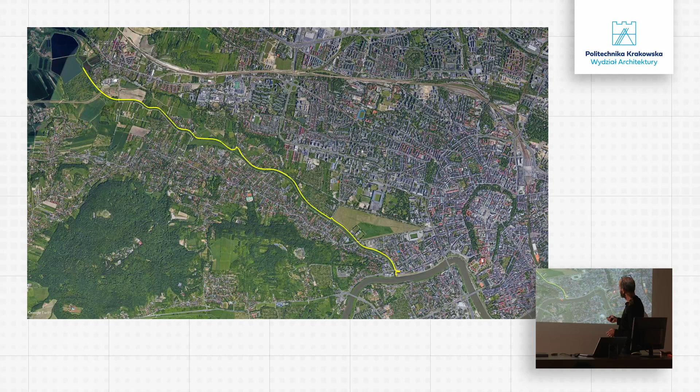Yeah, this is the Vistula River. So the Rudawa Canal goes almost to the airport. Going along this route, yesterday morning, I came across this image, which is a kind of ordinary image of this landscape, which is green.

It seems to be ecological, very much related with nature, particularly with this water stream. So it feels good. But if you look a little bit more carefully, you identify some things that are not as natural or as ecological as one might think. You see, if you look carefully, you come across some concrete structures, some buildings being built nowadays in the area with some so-called ecological devices or gadgets.

And behind the trees, the paradigm of ecology, you see some yellow elements, some yellow colors. If you look at these things more carefully, you realize that urban ecology, when it comes to ecology in cities, is not only about greenery, it's about the different relationships and the set of complex system relations established among humans and non-humans, materials, immaterial things also, cultural dimensions of the way we inhabit cities, and metabolic flows.

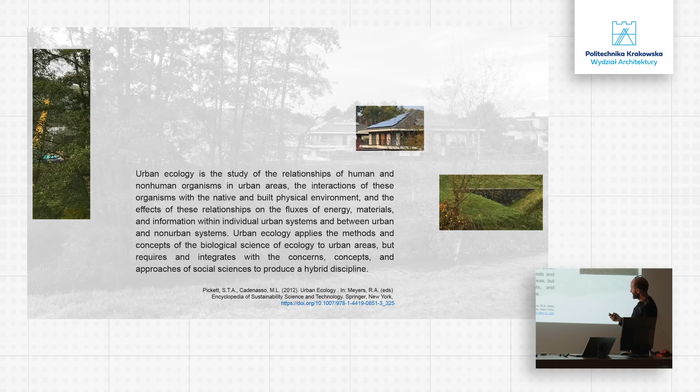And if we look more in detail to these elements, you may guess that we are talking about sewage system, throwing the water to the river canal directly, after some purification processes, hopefully. But also we see buildings being built at the moment with some ecological gadgets, solar panels, and that yellow color behind the trees is no more, no less than a building crane.

Helping out with the construction of new dwellings made of concrete, which is the most unecological material. This is the most polluting and most carbon dioxide emission industry we have in the world, even more polluting than aviation, for instance. And this all happens in this very idyllical landscape.

To me, coming from a very dense city from Southern Europe, this still looks like a very pleasant, very natural landscape. But my point here is that by looking sharply, by having a more intentional look at things, we may discover the complexity of ecologies happening all around us.

The driving thread of this ecological thinking for many years now has been water. Water being the most basic element present in any single ecological process. So it's nothing discovered recently.

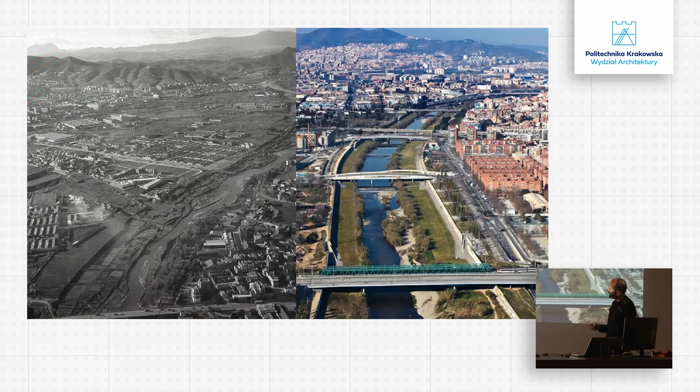There are two main rivers in Barcelona. One is the Besòs River. I've been working on that for some years now, but this ecological approach is more recent. Here are two images of the same river: late 50s, and how it looks today—quite urban. It has been regenerated, so today it may look like a very successful public space, but it has also been the stage for frictions between environmental assets and new urbanization.

Some people, coming from different contexts, may not even call this a river. It's much more of a water stream surrounded by dense neighborhoods, industrial estates, plenty of infrastructures, metabolic services, water depuration, waste management plants, and so on. So it's not what we commonly understand as nature.

But if we go back in time, not so long ago, we discover that in the early 50s this was quite a natural area. The river was not regulated. There were plenty of agricultural crops around it. Actually, Barcelona at some point, mid-20th century, was self-sustainable from a food production standpoint, and much of the food was produced here.

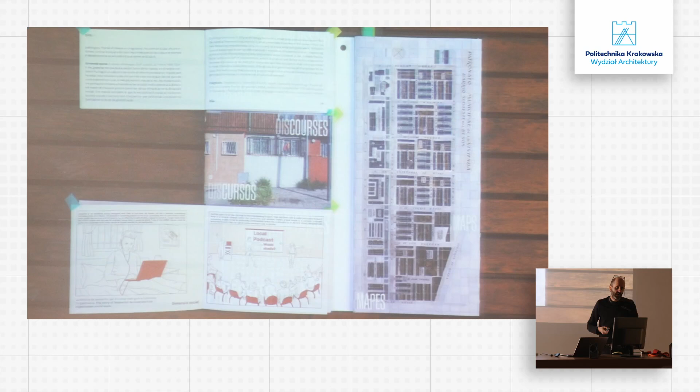As I mentioned, our book, or this book of books, is not a linear reading. These chapters are organized in 4 different books or sub-books, so the reader can play with them and go from one to another, jumping from concept to concept and making a cross-reading between the glossary, the proposals, the so-called discourses, and the mapping. The idea is that each reader may be able to come up with her or his own conclusions, building her or his own narratives. I will go now through the different chapters.

The glossary. The glossary is a collegiate endeavor. This is something that all of us professors teaching at this particular master program did together. We set a number of interviews. All of us were talking about our particular obsessions. At the end of all this process, we transcribed all these interviews, and we came up with a number of critical concepts for us. They are defined and included in our book, and these are the most important ones.

Actually, they are all of them here, right? And they are ordered according to the importance that we give to them all together. It's a kind of polyphonic definition of terms. They are all there defined by all of us, right?

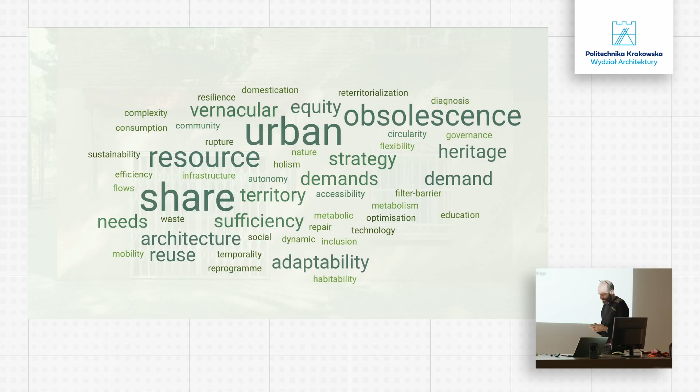So I would highlight some of them. Of course, the urban ecology question is an urban one. It's not something we can deal with from the object standpoint; we deal with it from a wider perspective, a wider scope. So that means going for urban. We pay a lot of attention to resources and demand, this equilibrium or balance between the availabilities of a certain territory, which are the resources, and the social demands. And everything when it comes to sustainability is about the balance between these tensions or components, right?

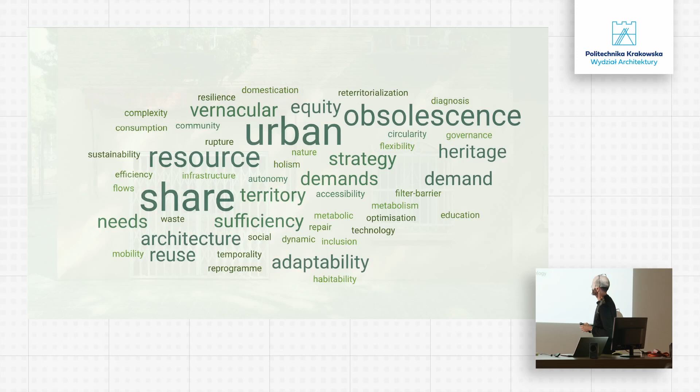Obsolescence is a very important word for us also, to recognize why material realities become obsolete, not because they become obsolete from their material standpoint, but also from their functional standpoint, their symbolic standpoint, from the social standpoint in general, right? So adaptability also is a concept we pay a lot of attention to. I won't develop longer on this.

You will have the book, and you always have the opportunity to go to the interviews that are registered and posted online on this website, UPC provides, upc.edu. There, if you search for glossary on sustainability, you will find this video of around 25 to 30 minutes where you will see, from first voice, the definition of these terms by the staff working in this research project.

Okay, maps. This is important. Once we identified this corridor, this Besòs River area, we started to analyze it using geographic information systems. We began by recognizing and analyzing what was there before the urbanization process began. This is a map from 1956. Besides the land use, this is just showing the imperviosity of the land, how impermeable the land was.

Because, as I said, the water cycle is absolutely critical for us. Being aware of the need for rainwater to drain down to the soil and replenish the aquifer is a matter of life and death for us in Barcelona. So before urbanization, actually, I forgot to mention, this is a delta area. Much of the drinking water in Barcelona used to come from here. Not today, because the aquifer has dried up due to processes I'll tell you about, but it was in the past. And this aquifer was replenished because the topsoil was permeable, right?

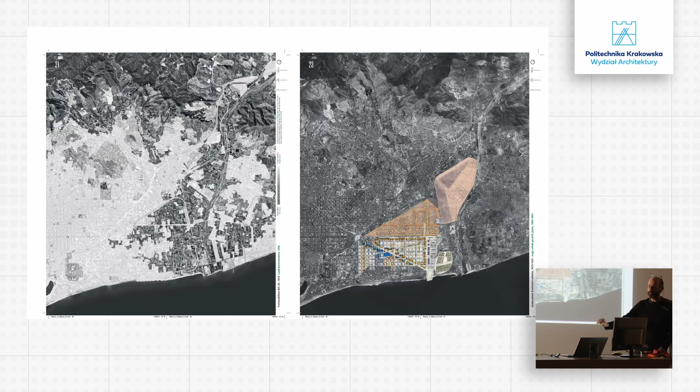But in the span of only 4 years, this happened in the city of Barcelona. This development, these are the original plans for the area. As you can see, the idea was to seal everything and extend the city to the very border defined by the river. And this is how the city looks today in terms of permeability. So this is an incredible disruption of the ecological cycles, as you can imagine.

So we started by acknowledging data that I won't show you, but it's available in the book. And this is what we call the climate intensity maps. These are different components that have been built over the last 50 years. The darker areas show the latest and most improved data.

This is crossing data regarding the exposure of a space to climate change, the sensitivity of the population living there, and the capacity for adaptation. These are the 3 factors considered when it comes to climate change vulnerability: exposure, being the physical conditions of the space, how impermeable an area is, how many trees there are, or this kind of physical factors.

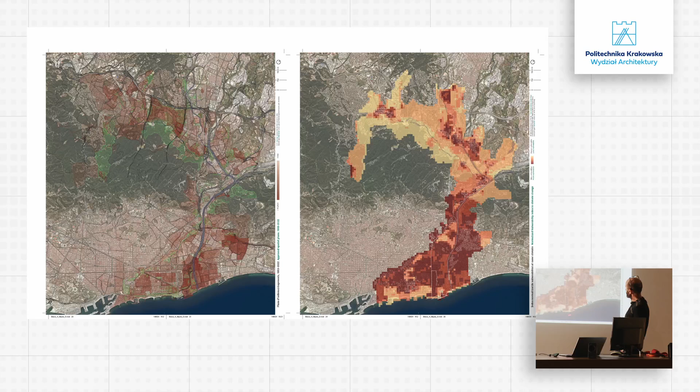Again, this part is quite dark in color, and the darker, the worse. Income per household is what you see here in this map, and NDVI, the normalized difference vegetation index for that area. So it all pointed towards this very end of the river.

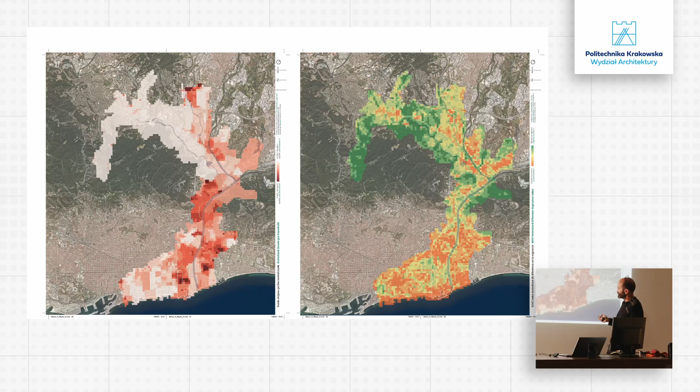So we started focusing on narrowing down to that particular area, and we developed some other maps, which you are seeing here at a closer scale: again NDVI, land surface temperature, Gini index, assessing inequality within a certain area, and again income per household.

After this process, it became quite apparent for us that this area was suitable for our studies, combining socio-demographic vulnerability with environmental vulnerability. So we were ready to identify our case study, that you will see in a closer look here.

This is the development of the area over the years. You see that we are moving from a 100% agricultural area to a fully, highly dense urbanized area. The sudden urbanization of this area happened in the span of only 5 years.

And because of the living conditions there, the environmental conditions were not that good. This is a delta area, so the soil is not stable for construction. It's quite unstable, so the buildings today are going through an acute pathology process, physical degradation. They are not stable because they are built on land that shouldn't have been built on, never.

Still, we identified 2 neighborhoods. One is El Besòs, this is what you're seeing on the screen, around 100 buildings, 5,000 dwellings, and 25,000 registered residents here.

We are not counting here people living off the system without being registered, which in Barcelona, as you can imagine, that number is high. We don't even know how many people are living in this particular area.

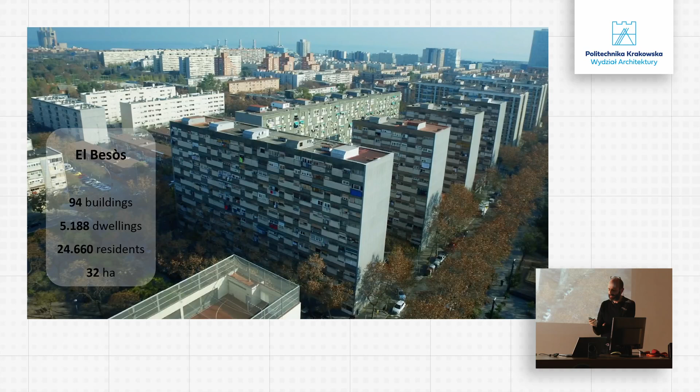And next to it, we have La Pau, half of the size, to make it simple: 12,000 something residents, 2,500 dwellings, 60 buildings, 17 hectares. So we are working in these particular areas.

These were areas that were very rapidly urbanized during the late 50s, early 60s, as a way to remediate or find a solution for the informal slums that were popping up all over the city of Barcelona as a result of this massive migration flow arriving to the city.

So the first newcomers to the city didn't have proper living conditions. They were living in barracks, in slums. So the Francoist regime at that time undertook this public housing policy, building these housing estates, which could even be defined as piling up vertically these slums, because the very basic conditions were not even provided.

The streets were not urbanized. In the early years there were no public facilities, not to mention public spaces, but still conditions were a little bit better than in the previous informal slums.

So from the physical standpoint we have described these case studies from the physical and historical standpoint, but most importantly, we have been in close contact with the different local agents working or living in these particular areas, from politicians, authorities, to technicians, officials working at the city council.

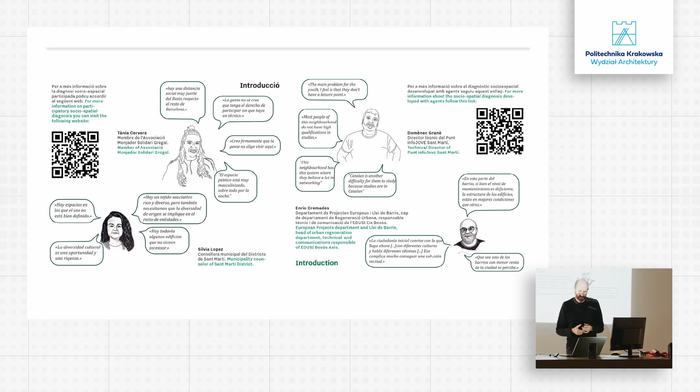And from the physical standpoint, it's not only the housing stock, but also the capacities and the conditions of public space, basically a space in between buildings. We are in a very particular urban morphology in which 80% of land is free from buildings.

The footprint of buildings means only 20%, which is quite different to traditional cities, where the proportion is quite the opposite. In traditional very dense cities, like the city center of Barcelona, 20% of the space is public space, streets basically, and 80% is just building footprint. So here it's the other way around.

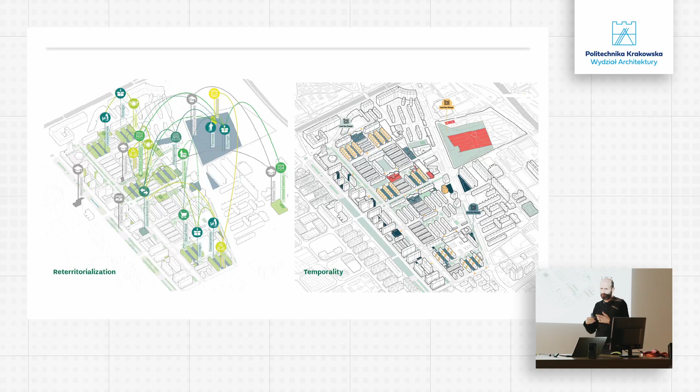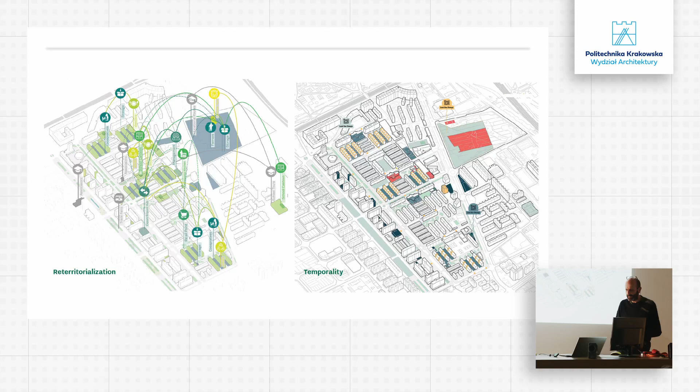That's why attention to public space, to space in between buildings, is critical for many reasons, for the quantity but also for the potentiality, when it comes to urban farming, when it comes to this hydrological or water cycle process. It's super important to intervene in those in-between building spaces.

Also an exploration or description of the housing stock. This is something I forgot to mention: our master's program is not an urban planning program, it's a transversal program. Professors working from different disciplines and departments cooperate together to give our students a transscalar and holistic understanding of these ecological issues. For the neighborhood of La Pau, the typological diversity is quite rich and interesting, which is an asset when it comes to flexibility and adaptability to new needs.

Having identified the case study, then come the discourses. There are seven working lines for us, seven research tracks that we are following, and they are called discourses. I will go through them very quickly, just naming them.

The first one is the so-called social metabolism, which is a discipline in itself. It's a scientific field that aims at describing ecological processes by measuring and assessing the flows of a certain society, meaning water flows, carbon dioxide emissions, material flows, and trying to describe the socioeconomic model in that particular area through the assessment of the different flows taking place there.

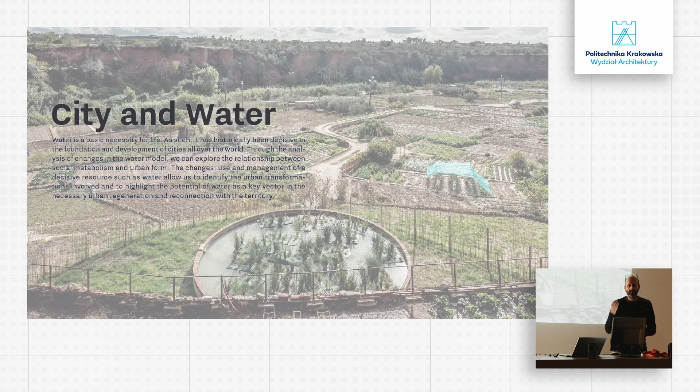Then city and water, understanding water as an indicator, a very good way to disclose the conditions and the aptitudes or suitabilities of a certain territory.

City and energy is very much focused on describing the different models we have of using the territory through the assessment or description of energy systems, called energy cultures. The key point here is the usage, yes or no, of fossil fuels. We are not for that, as you can imagine, but we are also a little bit critical about the extensive use of solar energy — we can talk about that later on.

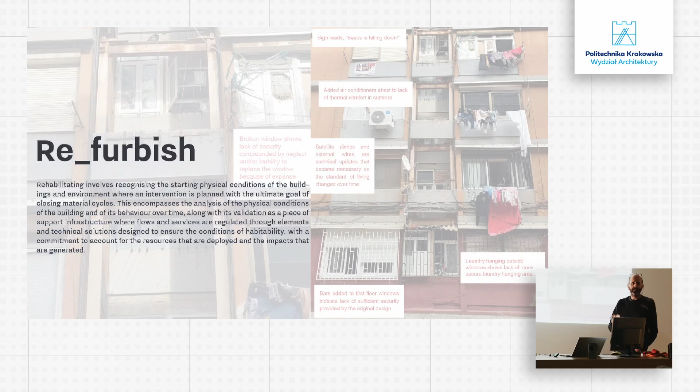City and society is about engagement with local communities. Then refurbish pays attention to the material conditions of the buildings — we can get a lot of information just by looking at the facades and analyzing their material condition, what gadgets or changes the facade has suffered over time, because users typically express their needs on the facade of buildings. AC popping up on facades, for instance, is a clear indicator of an unsatisfied need. So we have information — clothing hanging on balconies, for instance, shows a need that is not provided for within the domestic space, and so on.

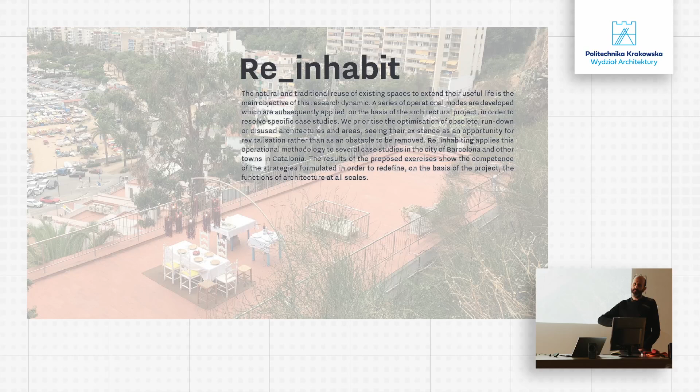Re-inhabit is very much about the functional program of buildings, especially residential buildings, and how a nuclear family-based architectural typology — a dwelling of 80 square meters with 3 bedrooms, addressed for a mono-profile — may or may not give a proper response to the current needs of society. So Re-inhabit is about reflecting and discussing the functional programs of cities.

And finally, Regenerate is about understanding the wide scale of the city and how environmental systems or environmental commons can work well or not in light of the many challenges we have ahead. So we define these discourses — these are the lines our students work on during a whole academic year.

Also working with local schools and secondary school students — we go there, learn a lot from them, and make them participate also in our program. We think that with these kinds of issues, it's important to plant the seed before students come to the university. That's why we reach out to the secondary school system and are also part of their activities, with some cooperation.

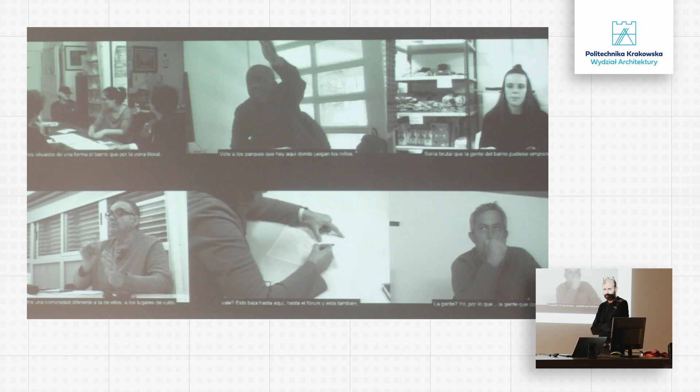And of course, the now well-established methodology of reaching out and getting to know local agents, local associations, migrants, officials, and different entities that we engage in our discussions — we learn a lot from them. As I said, all this process has been recorded; you may find the different interviews there, recorded and available in Zona Video UPC, where there is plenty of very interesting information.

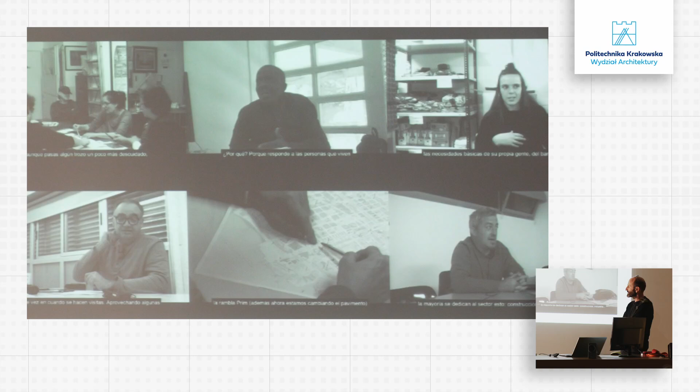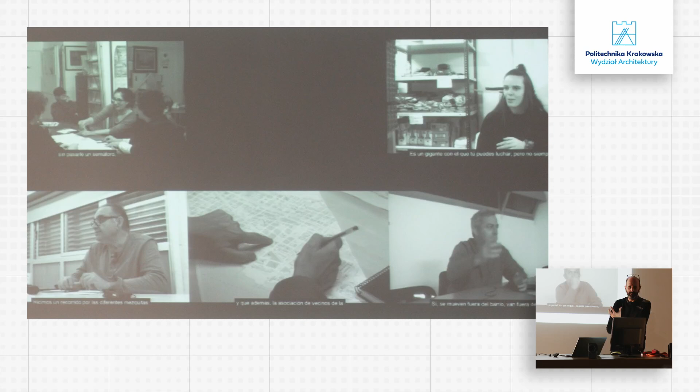It's not a punctual contact that we establish with them. They are together with us all along the process, and they will continue. We believe in endurance, in being there, presence, a long time. So we have been more than 3 years now in close contact with the different associations.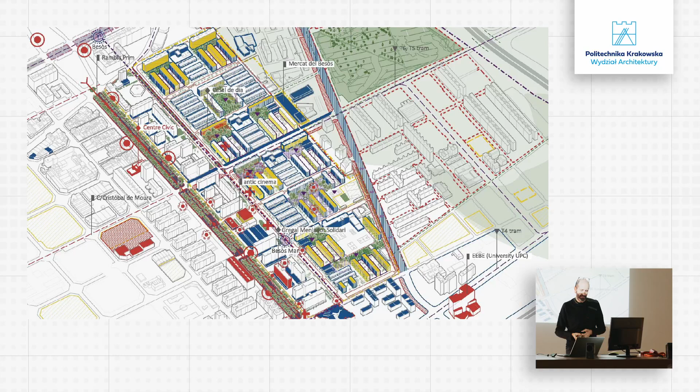We placed these issues or topics in this diagram in order to identify where we may find the weakest and strongest points of this particular neighborhood. And then we translate that into space. We territorialize those topics, following the same color chart. We describe spatially this very abstract diagram that we have here.

One of the final outputs of this work is a magazine that is not intended to be a scientific magazine, even though it has its number and it's registered and so on. The idea is to spread knowledge and disseminate our knowledge across the local residents. So the language used here is quite popular science language. And we distribute this magazine through the different communities that we have been working with.

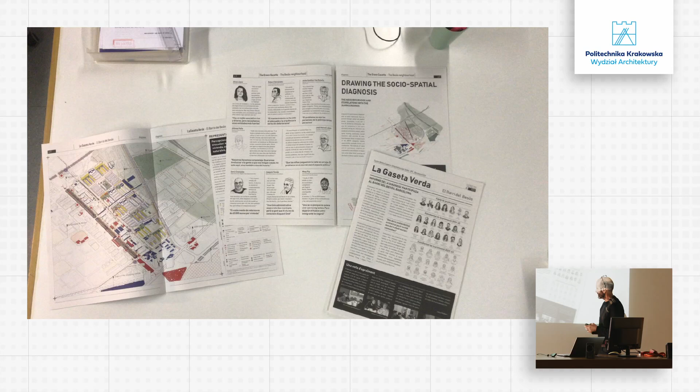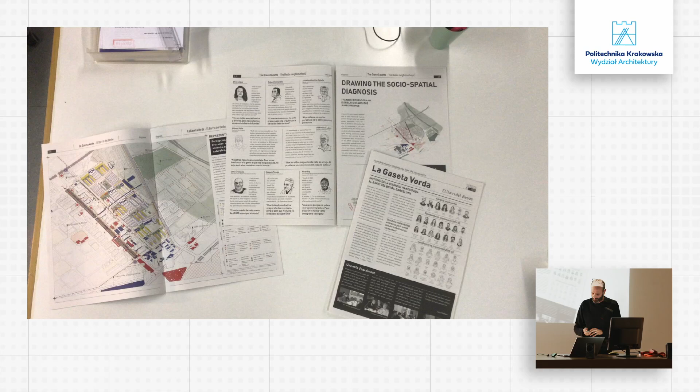We are at the moment preparing more of these magazines related to other neighborhoods that we, together with Politechnika Krakowska, are working on.

The proposals — this may be the part that you're more interested in. So I prepared 3 proposals, 3 projects. Of course, I cannot explain them extensively, but I will try to go to the main points.

Our master program is quite a horizontal one. It's for sure us professors delivering, or more than delivering knowledge, trying to coordinate the way knowledge is delivered or shared. It's an international program, so students from all over the world are coming. In this particular venture, over the last 2 years, we have had students from more than 25 nationalities.

As you can imagine, coordinating that, different cultural backgrounds, different mother tongues, etc., it's a challenge. But I think I can fairly say that we have succeeded, and at the end our students keep friends for life, in a way.

First proposal that I wanted to show you: OBRES, a new model of sustainable community construction, Besòs Organization for Ecosocial Regeneration. This has to do with the idea of suitability and feasibility. We make numbers, a lot of numbers, a lot of calculations, so that our proposals are taken seriously by the officials, by the public authorities.

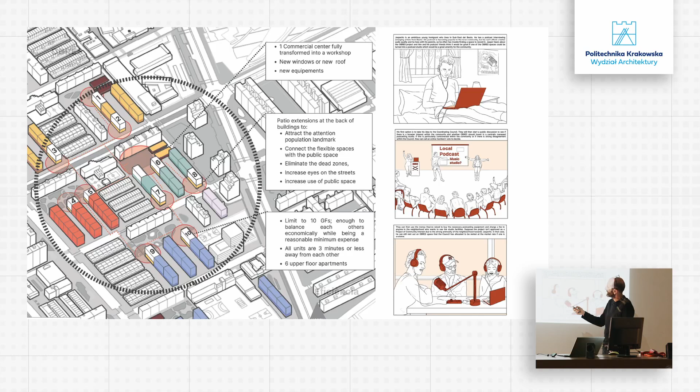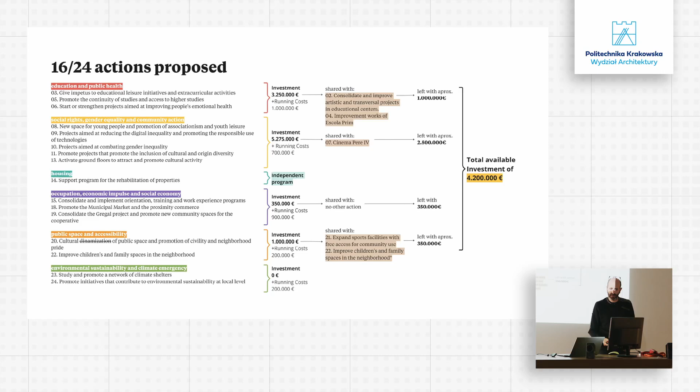I cannot go deep into them, but the important thing is that they are assessed. In this case, they were put into relation with an existing initiative, the Pla de Barris, the neighborhood plan for the city of Barcelona, and they are assessed economically — plenty of calculations. This is the final summary sheet of the whole calculation, but there is a whole super complex Excel behind that. So the required investment is assessed there.

The image is a little bit burned here, so it's too bad, but this is an axonometry describing the several interventions, the several actions proposed for this neighborhood — from reprogramming some abandoned public buildings to intensive work at the ground floor level. We see the ground floor level as a critical space for intervention, the relationship between the building, meaning the private domain, and the ground or public space, meaning the public domain. There were some technical issues regarding differences of level, activities allowed or not allowed. Our students also read the urban regulations — what is allowed, what is not, what should be done, or what should be changed.

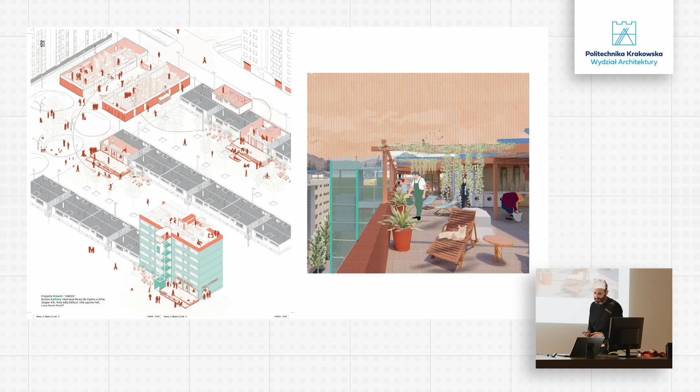I'm sorry this image isn't showing the detail, but maybe later we can see it more clearly. Some before and after images are really important to show the improvement, the difference between before intervention, how these spaces looked, and how students imagined them after.

This functional program for the abandoned public building is based on co-design, a dialogue with local agents who posed their needs and what they miss in the neighborhood. Assessing whether that's possible from the architectural standpoint, students design and propose interventions.

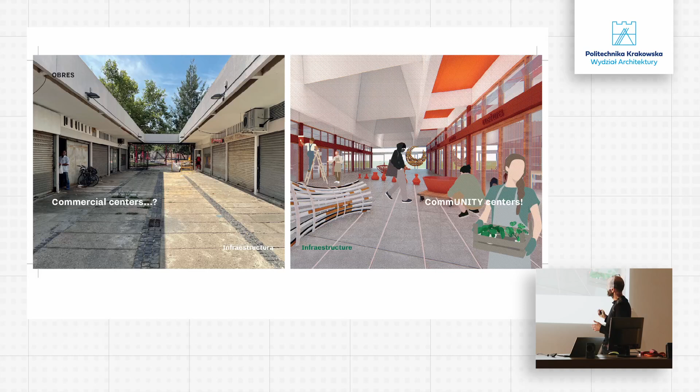We think that's not enough—that's a technological fix, but it doesn't mean social engagement. We strongly believe communities need to be engaged with their actions. If they're just provided with solar panels and a solution for the facades without being part of the process, in the end this investment will be lost because no one will take care of it. So this is our proposal.

Some of the improvements proposed by the City Council are considered, like improving vertical accessibility with new elevators. But we propose a reconfiguration of the rooftop, rather than just planting solar panels—maybe some common activities. This has much to do with redefining the functional program as a radical proposal.

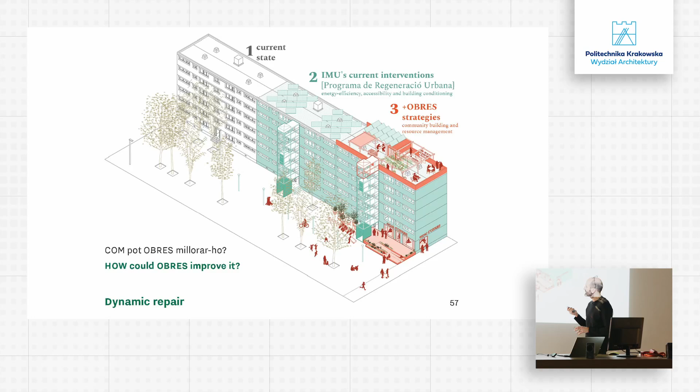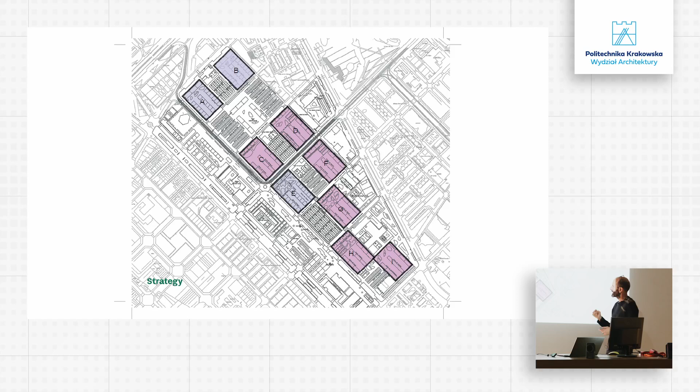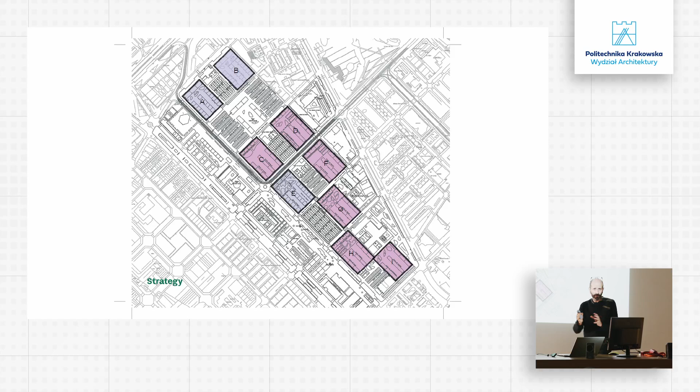So this is one of the proposals. Another one is called Ripple Unit, which starts by identifying the geometrical pattern, the stamp that is repeated—finding the case study, that paradigmatic unit that by being improved may improve the whole neighborhood. It's a pilot project: identifying the generic solution and working with criteria for the reurbanization of the in-between spaces.

Assessing the relationship between permeable and impermeable in the current situation, the proportion is 1 to 15. After some treatment and use of certain materials, the proportion may be changed so the water cycle can be completed. From the architectural standpoint, you may be familiar with Lacaton and Vassal's interventions in Bordeaux.

That intervention works with the existing typologies, expanding the space by building—instead of just adding thermal insulation or a technological fix on the facade—the idea is to enlarge the space and build a galleria as a buffer zone. Rather than working with planes, we need to work with deep devices, with transition zones, and the reconfiguration of different typologies.

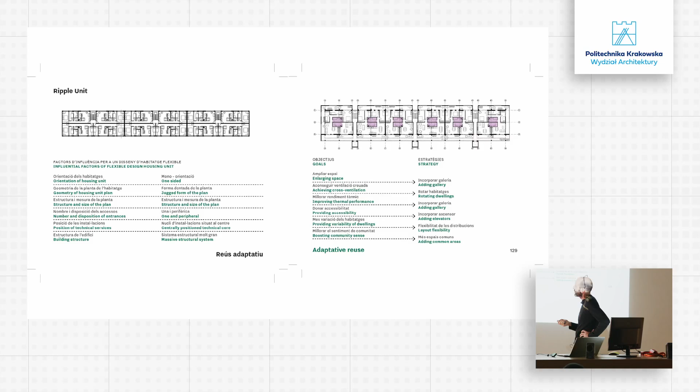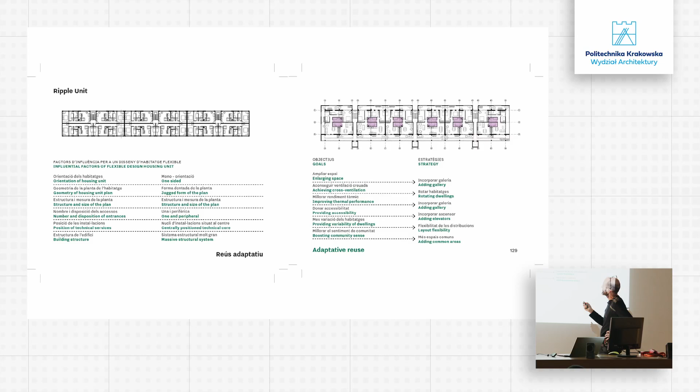In this particular case, the typologies were not crossing—they faced just one facade, which doesn't work well in terms of cross ventilation. Cross ventilation is a basic condition for sustainability in residential buildings. So based on that, and studying the structural system of the building, students proposed extending the building with these gallerias and reconfiguring the functional program toward crossing typologies.

This exploration shows different combinations, from the urban scale layer to the more detailed scale—different typologies, diversifying the solutions, because society today is much more complex than it was 50 or 60 years ago, when this neighborhood was built.

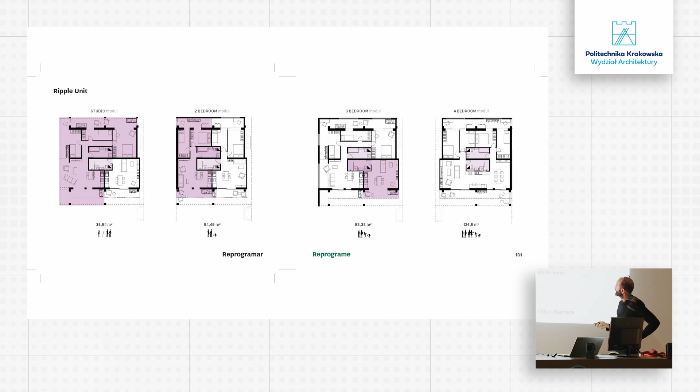So these are different conditions, and this is the current state, the rotation, and the proposal. These are different solutions and how they behave in terms of energy saving. This is not my field of expertise, but there is a software calculating that - I don't quite remember the name of that particular software, sorry for that.

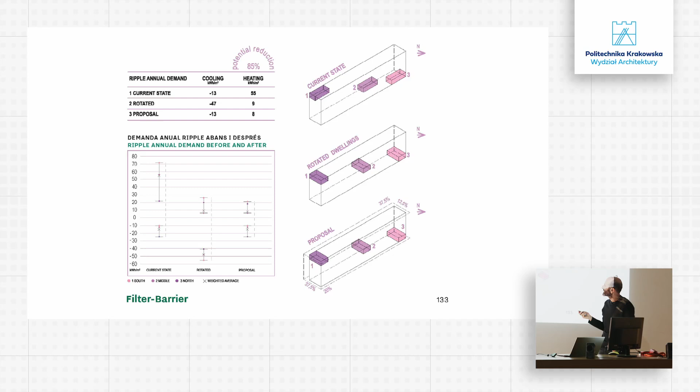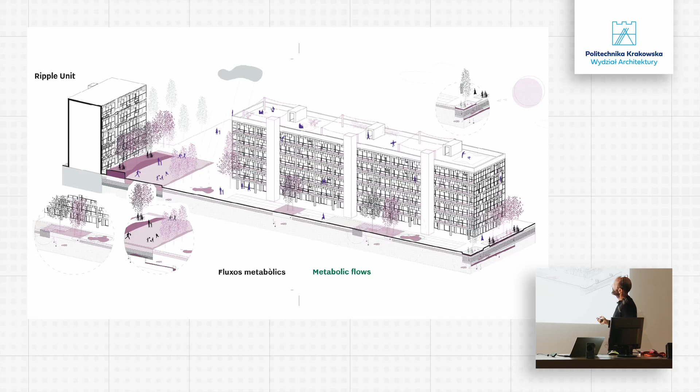And then again, an overall image of the whole intervention where you can see the final configuration of this building and some sustainable urban drainage system solutions proposed for the surroundings of the building.

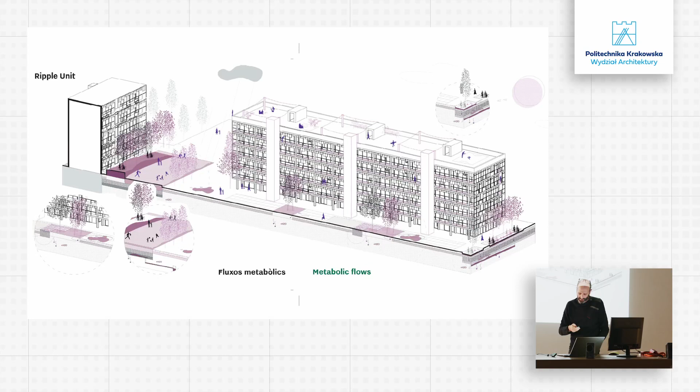Last proposal, La Pau, the other neighborhood, autopoietica, hydrological or hydric communities. So these are the three scales that this project covers.

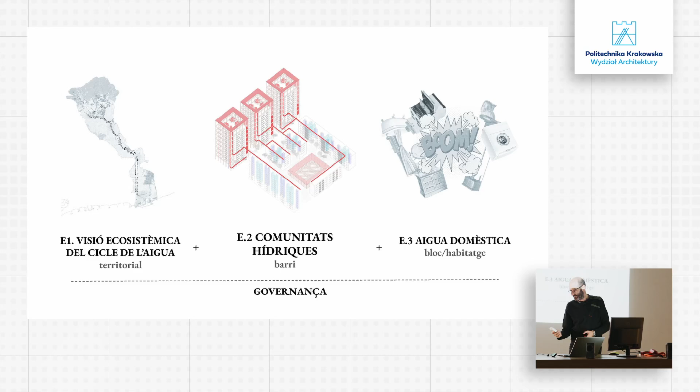Let me try to lower the brightness of the... sorry? Okay, well, anyway, I'm so sorry because these drawings, they are really good.

But anyway, you can guess that there is the territorial scale, the district unit or neighborhood scale, and the domestic one. Let's have a look at them.

As for the urban scale, to start with, students analyzed the hydrological structure of the site - this is the Bessos River. In the past, many water streams went down from the mountains, the Serralada de Collserola, to the sea, and they have left their tracings on the urban fabric. The city has been shaped by these previously existing water streams. Today they don't run on the surface, but the city has grown along them, so we can follow their form all along the urban fabric.

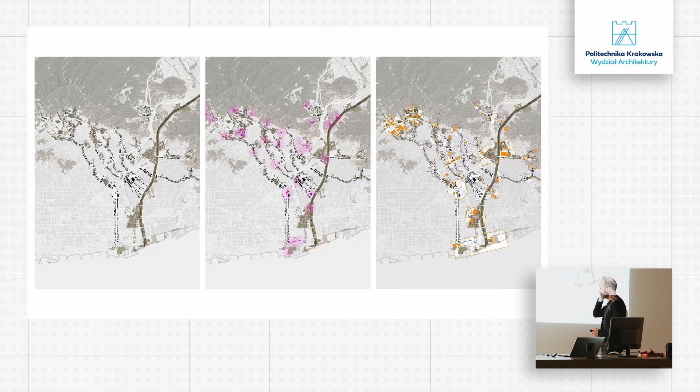Today these water streams have been piped and put underground, and there are collectors all along these former water streams, with some deposits along them too. So this is how the sewage system, or part of it, works today, still following the same rationale, tracing, or geometry that the water was following in the past.

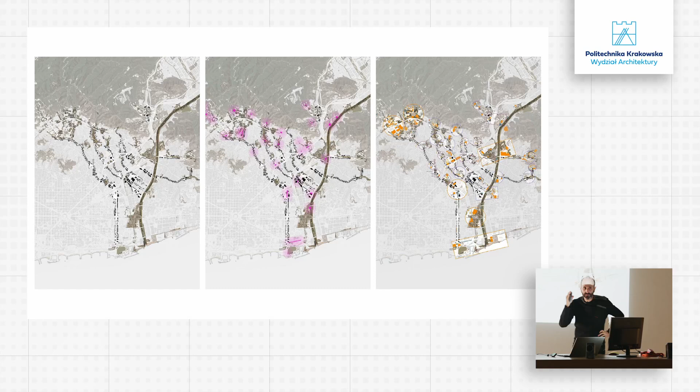So based on that, and using those deposits as an asset for what they call hydric communities, they identified areas for potential intervention, with La Pau being one of them. So the first thing is to identify the ideal case study.

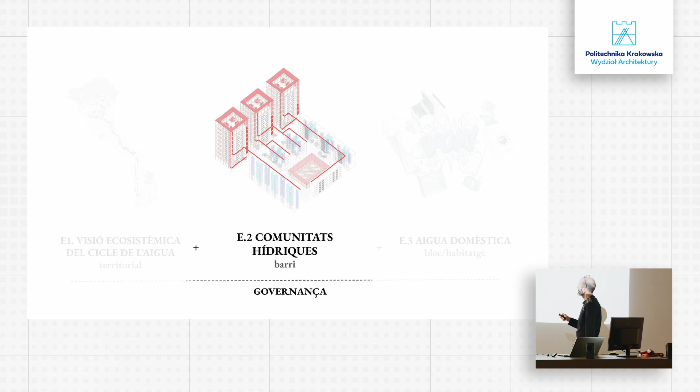Here you see a kind of axonometric showing how rainwater is collected on the rooftops of different buildings, and this water is driven to a public space area where an impluvium - if you're familiar with the Roman term - this collector of rainwater creates a new public space where water is celebrated and the community is built around it.

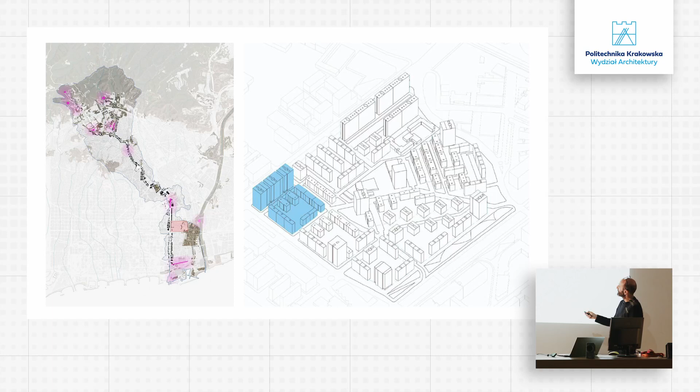So this is the whole neighborhood of La Pau, in relation to the wider territory, and within La Pau there is an area that they used as a kind of pilot area - the detection of towers and pressure deposits.

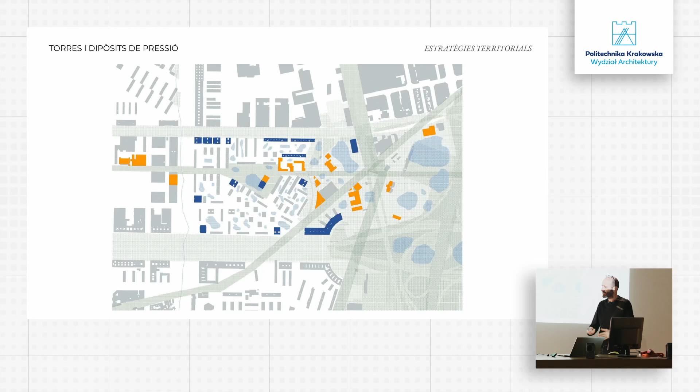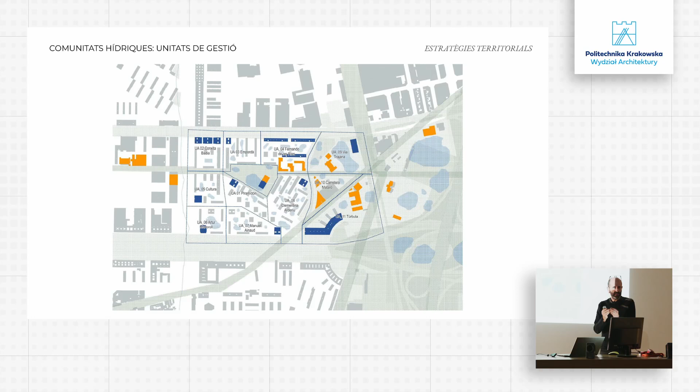Those areas that store rainwater, they intend to use as basic infrastructure for these hydric communities. Then the micro basins, by micro-topography, using LiDAR as a source of information - using geographic information systems and LiDAR, a kind of laser recognition of the surface of the Earth - we can obtain very precise microtopography of a particular site, thereby defining the sub-basins of rainwater collection.

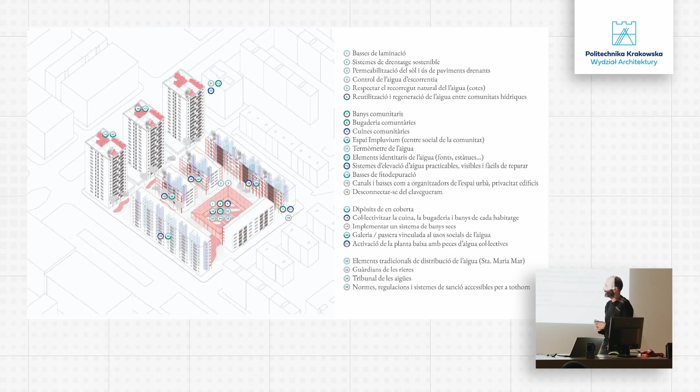They proposed this model for the community, which is not only about collecting rainwater but also recycling gray water, putting it back into the water cycle of the whole area and reducing consumption. We'll see how they manage that.

Maybe some of you are familiar with rural areas where, until very recently, social life happened around water. In Spain we have fountains in every rural village - we call them pilones. Those of you from Spain may still be familiar with the term. Everything happened around that because there was no drinking water in the households.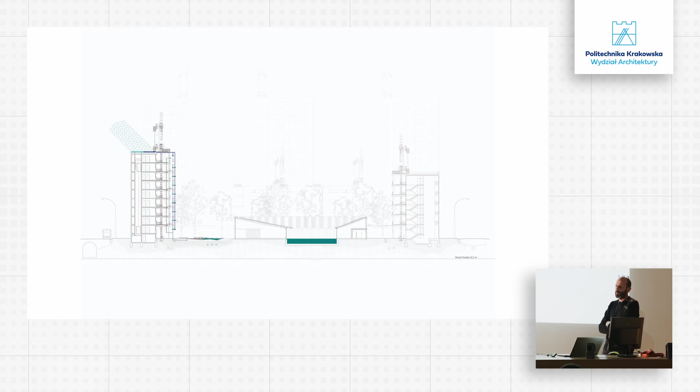So people organized around this common good. That's a resource that is managed and taken care of by the community, right? And this is very important. This is what I refer to when I talk about community feeling, right?

So the last scale or the last chapter of this exploration is, if I may say, a kind of socio-political criticism of how we have organized our life, depending or being so dependent on utilities, right? On this high standard given-for-granted infrastructure that each of us owns and makes use of at home. So what will happen if we keep up or continue with this level of consumption? Their statement is that at the end we may explode, right? And everything will be run down in some way. Sorry for the image again.

So this is the existing situation where the humid zones are located in an existing building of La Pau, a kind of in-between solution. This was proposed by Engineers for Sustainability, an association in Barcelona. So they propose to centralize some of these humid activities, so that allows for a more optimal use of this resource, water.

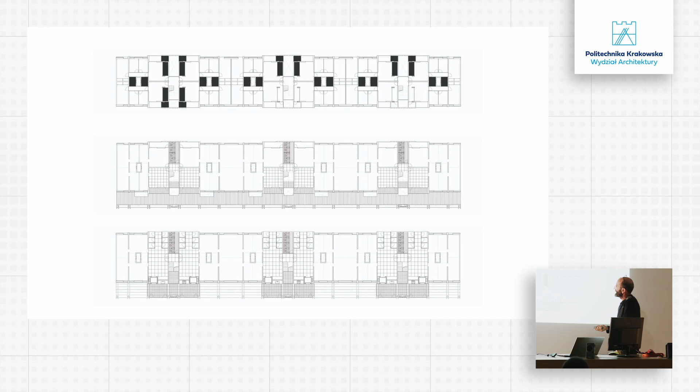And this is the proposal by our students. So what they did is assess for each humid room what is the consumption today, where the water comes from, and how the water is disposed of. The water comes from the drinking water network or infrastructure, and not all the water we use at home needs to be drinking quality. So by being aware of that and by recycling gray water into the system, we may save a lot of drinking water, which, by the way, is very energy consuming.

To purify and make water drinkable, at least in Barcelona, is super expensive from the economic, but also from the environmental standpoint. And as we are going through drought lately, they are building new desalination plants along the whole coast of Catalonia, and the cost of that, environmentally speaking, is super, super high.

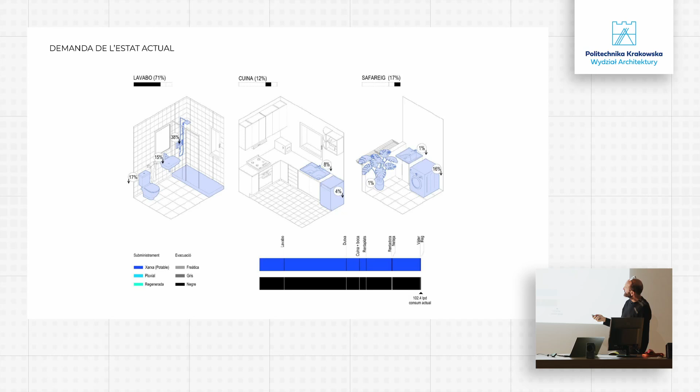So they analyzed that, and this is the existing situation. This is the situation according to the second proposal. Some of the water is coming from the drinking water network, but some other may be recycled or coming from the phreatic, from the aquifer. So that means a lot of saving. And then the disposed water, some of it goes directly to the sewage system, but part of it goes to the recycling system within that hydrological or hydric community.

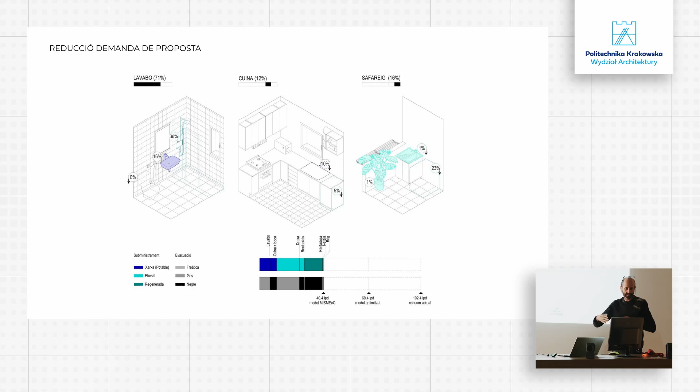And this is the proposal - sorry for the drawings again, my apologies - and this is the final proposal on how much water is saved. The idea is to keep this resource as local as possible.

So this is how they see the interior of their proposal. It may look to you a little bit - I don't know what word to use - but I can tell you that not this, of course, but something like this, I have it at home, and it's working well. I mean, I'm saving. I can give my example, as an example, because I have the data and I can give this as a fact that this is saving a lot of water at my home.

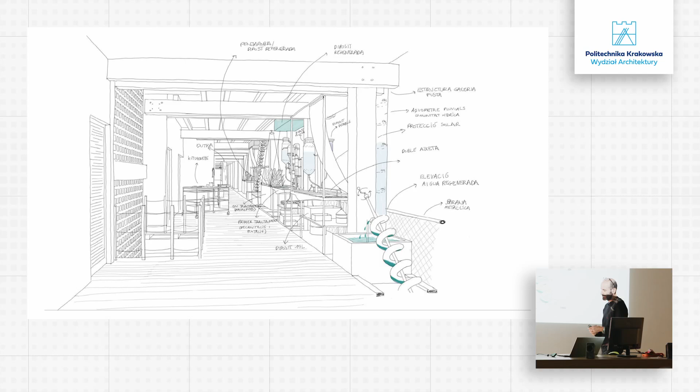So it may look a little bit utopian, but when it comes to scarcity, and definitely, I don't want to sound apologetic, but definitely we are going towards scarcity. We'll see - this kind of new thinking may be, I don't know if needed, but at least appropriate.

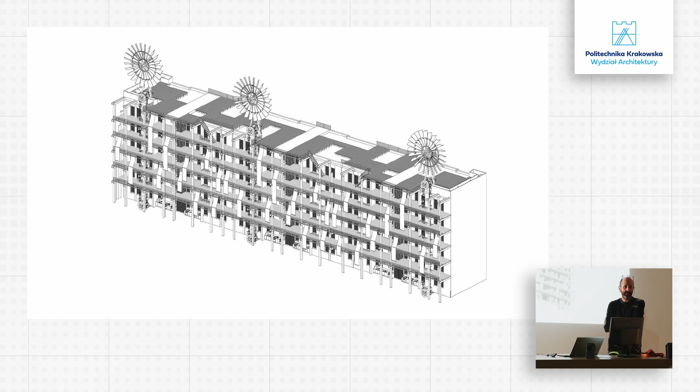And this is how their building may look like. Again, some exotic devices if you want, but if you think in terms of how much energy is needed to keep a minimum pressure for consumption inside dwellings, because the water is pumped, that means a lot of energy to keep up with the system. If we could be able to take up water and store it at the upper levels by using a non-fossil energy, but an energy that is distributed over a long time, like wind energy, like it has been done for millennia in our societies, we could save a lot of energy.

And more importantly, we would be safer in general. There was a blackout that happened in the city of New York, 2003 I think it was. For two days, electricity was not running in the city. Of course, there were some issues, but as for the water system, the water was still running in homes. Why is that? Because water is stored, and you have these images of deposits on top of rooftops.

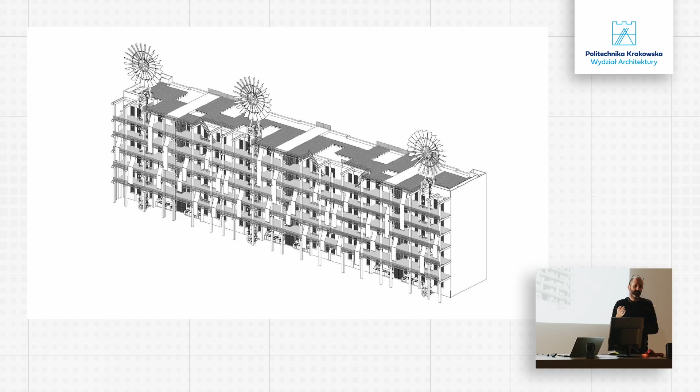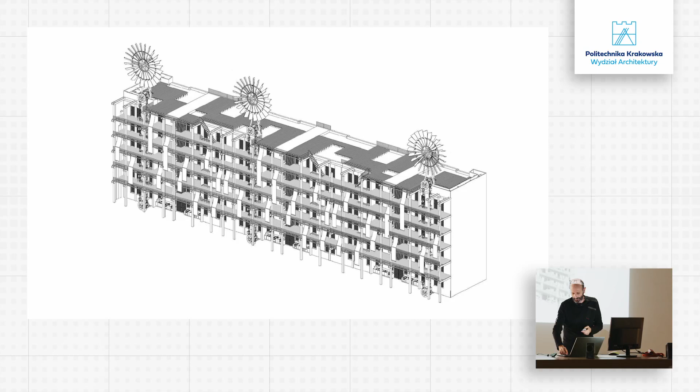By gravity, something as simple as gravity, the water was still going out of the taps, because they didn't rely on pumping systems that require electricity to function. For me, this is a very good example of how we can be more resilient in light of coming disruptions that may happen more and more as we walk towards environmental disruptions. Maybe you're aware that now in Cuba there is no electricity, they are going through very difficult times.

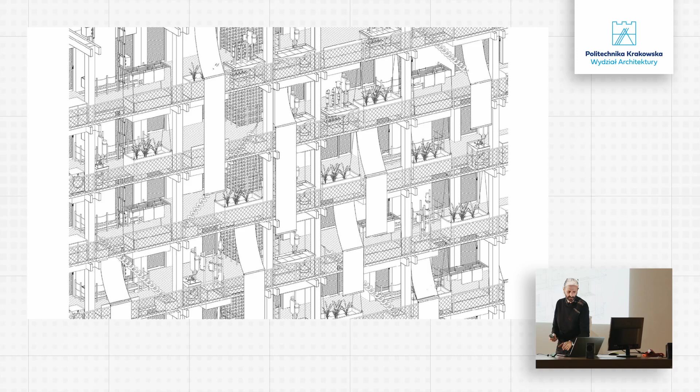So this is the elevation of the building, again showing how this shapes architecture. And this is not just the facade, but again the idea of not working with sheets, but working with filters, in the literal way but also in the allegorical way.

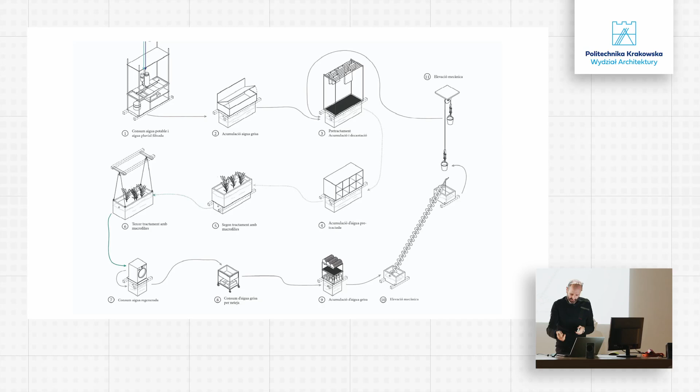Facades as filters of different conditions, as buffer zones between outdoors and indoors. And some engineering devices, proving that this can be done, they designed some of them, they assessed the cost, and they finally built an image. Again, this narrative, the capacity to communicate, to deliver knowledge in a very easy way to understand.

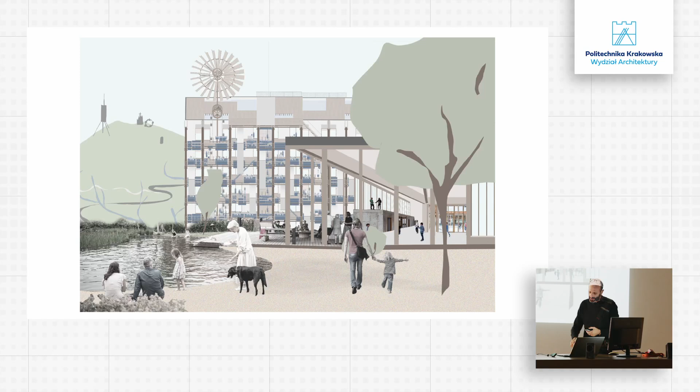So these are the three proposals, and finally a few words about how this is going to continue, or what is our outreach. First, and more obvious, the work with communities. We are giving back to the communities what we have learned along the process, and they may use this as a kind of tool in order to build community, to strengthen ties.

Across or among them, and also to have some technical proposals to, not necessarily contest, but to work alongside the authorities. Because sometimes authorities, it's not like they don't have the will or the capacity, they don't have the time sometimes. So it's very good for authorities to have some informed, engaged communities that are proactive. They are not just receiving proposals and accepting or rejecting them, they are also an active part of the process. And we somehow like to think that we are helping in that direction.

Exhibitions, this is also something that we are promoting as an outcome of this two years long process. We came up with an exhibition, we produced this exhibition that at the moment is traveling upstream and downstream the river, visiting different civic centers and local communities. They are able to go there to know what we are doing. We are organizing talks and explaining what we are doing.